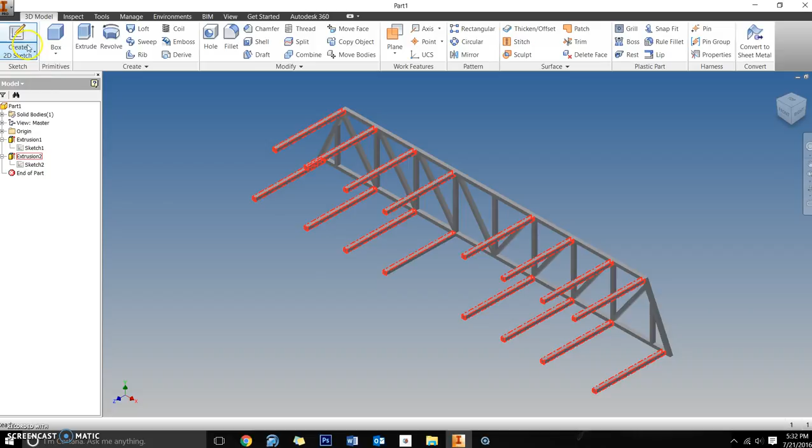Alright, so now we're going to create a third sketch. We'll go to create 2D sketch, and you're going to put that third sketch on this bottom left hand corner, on that face. So you basically create a third sketch right there. Then you're going to finish the sketch without doing anything.

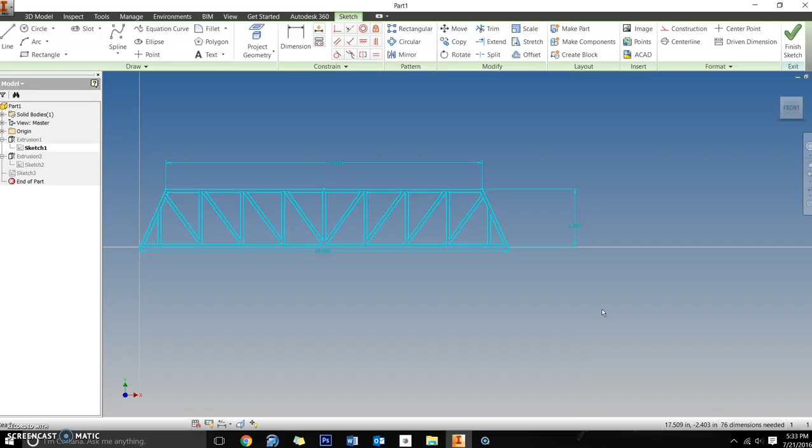You're going to go into sketch 1, double click to open it up. Left click and drag a selection box completely over all the elements, all the line segments in sketch 1. Then press Control C, the copy command, and finish that sketch without changing or modifying anything.

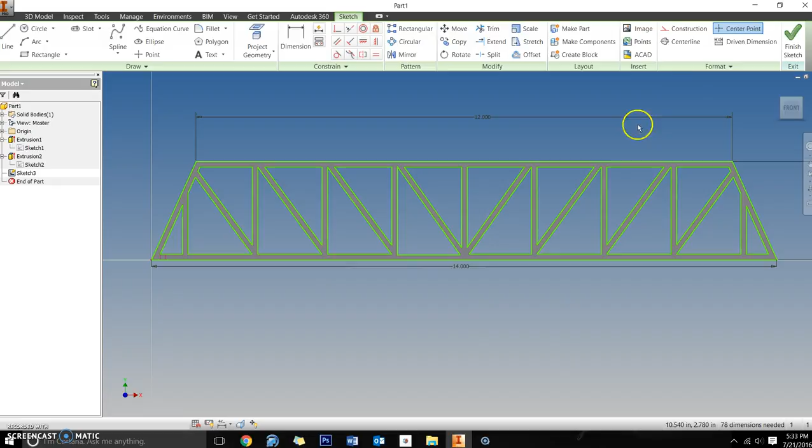Go back to sketch 3, which was on the end here. I'll just drag this over so you can see what's going to happen. Now I'll press Control V, as in Victor, and that pastes it in there. Let me show you what happened. I go to that isometric view, the home view, and I have that exact same replica of the first truss over here. I didn't have to redraw anything.

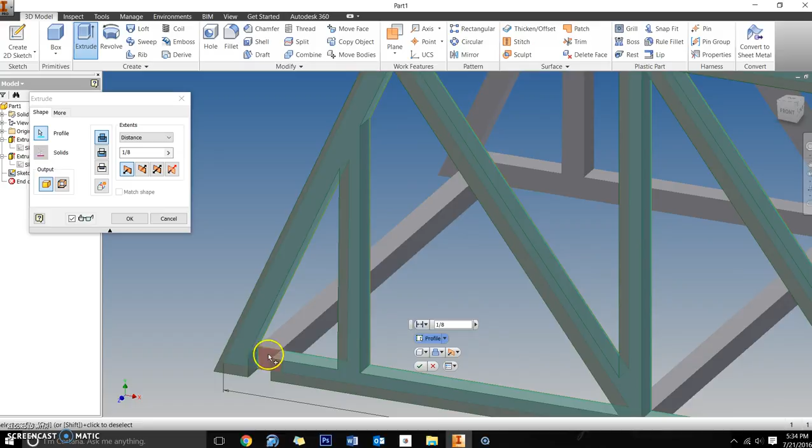So now I'm going to finish the sketch again, and extrude this at 1/8 of an inch. Again, I select that side. The only area you might have trouble with is that side we selected - for some reason it always leaves that out when we first initially selected it to be the face of the sketch. So zoom into that little area and extrude that out 1/8 of an inch as well, then click OK.

And there you go, you have the bridge. It's 3 inches wide. This example is a total of 3 inches wide, 2 1/4 for my height - again, you can have anywhere from 2 1/4 to 3 inches in height - and the length is 14 inches.

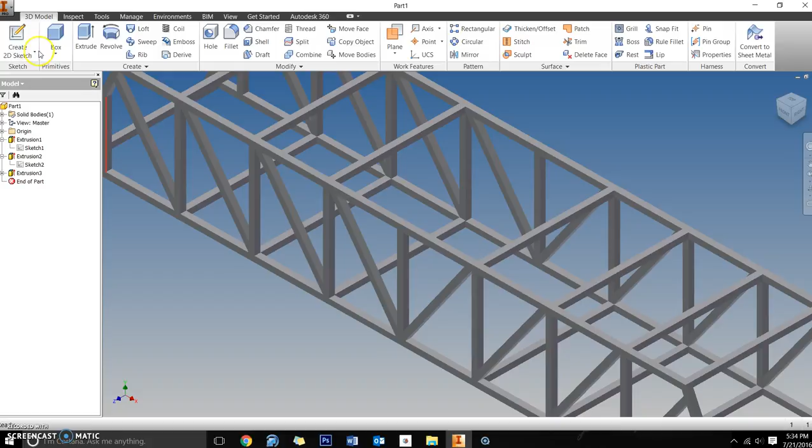Now one of the last things you need to do here is put a load platform on this. So for the load platform, I'll click on create a new 2D sketch, and again click on this front face. From there, I'll click my line tool, and I have my midpoint right here. The load platform is a 3x3 piece of balsa wood that's 1/8 inch thick.

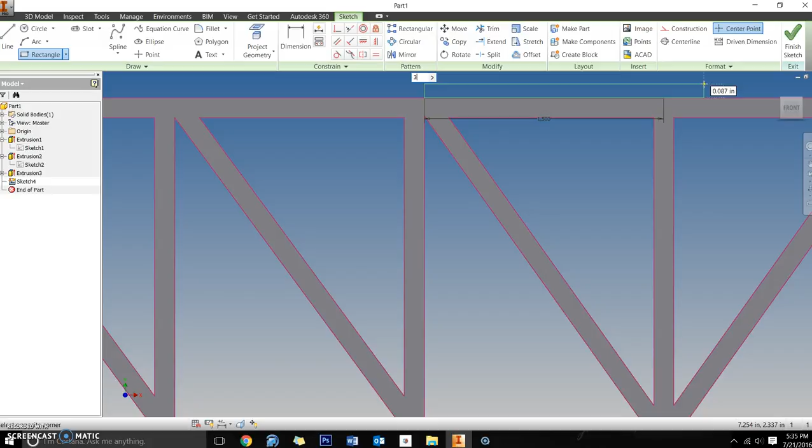So from that midpoint, here's my midpoint, it's 7 inches - you can see on the X axis it's 7. I'm going to click there, come over 1.5, which is half of 3, right? Then I'll click my rectangle tool. This gives me a guideline point. I'll select that point I just created the line to, and now create a rectangle. The rectangle is 3 inches for the total length, and I'll tab over, and the height of this will be 1/8. Then I'll finish that sketch.

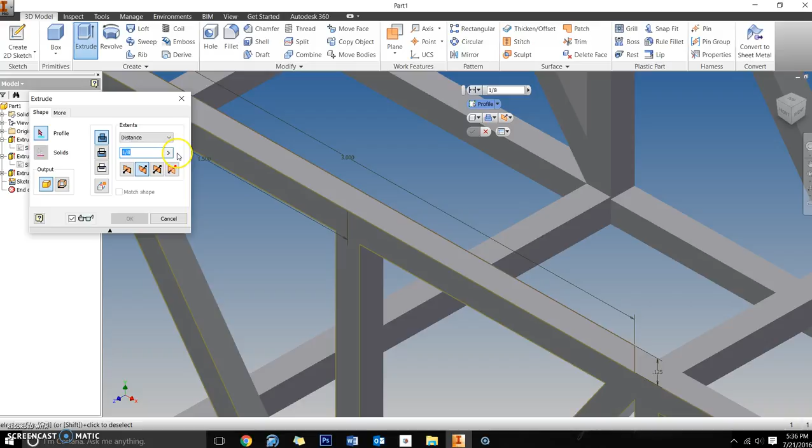Now this is in the dead center. I'm going to extrude this, and I want to extrude it back - see this direction, how it's pointing back. I'll make this 3 inches and extrude that back. If you had it going forward, it would just shoot out forward, and you can just change the direction there. Make sure it's going back across to the other side, and click OK.

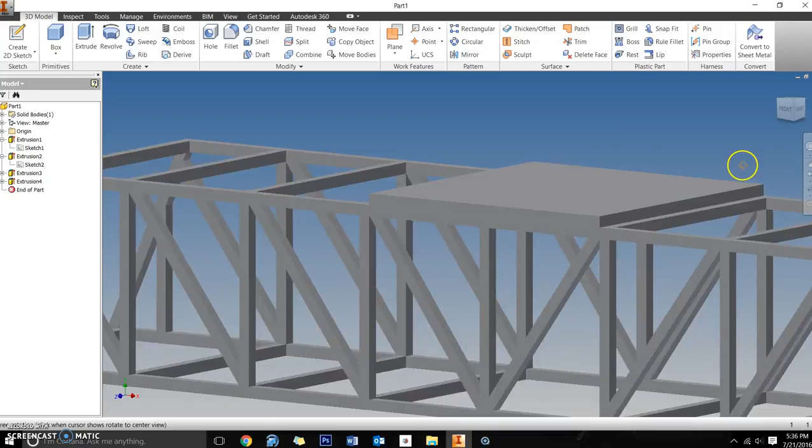At this point, you can see now that load platform is all the way across the bridge. The next thing I'm going to do is create another sketch on the top of this.

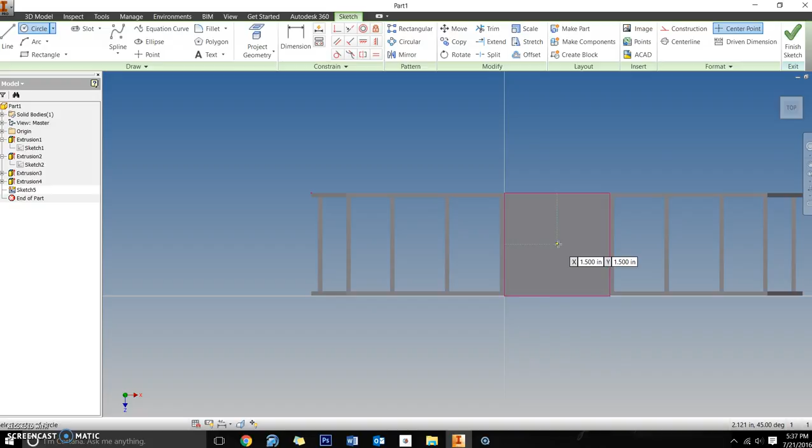Create a 2D sketch right on the top surface. Click your circle tool, and I'm going to put a hole in the dead center. The nice thing with Inventor, it'll give you guidelines showing you where the exact center is. So if you eyeball where you think the center is, you can see a vertical line and a horizontal dotted green line showing the exact center. If I look at my X and Y, it says 1.5 and 1.5, so you know you're in the right spot.

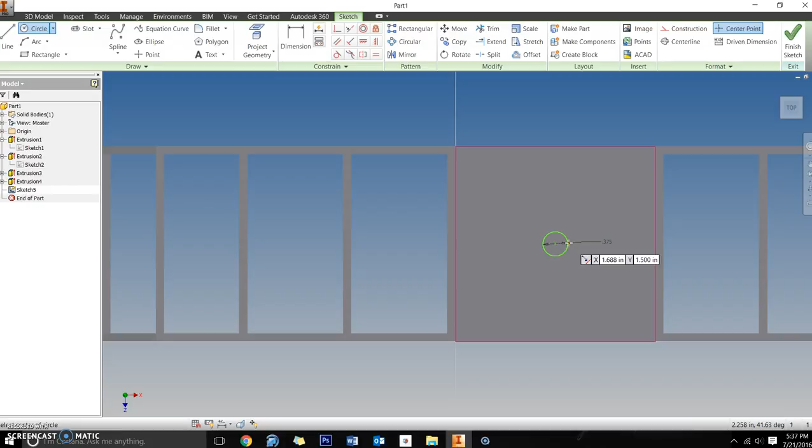So I'm going to click on that, and this is going to be a 3/8 inch circle in diameter. We'll finish that, and then extrude this. This time I'm going to cut, so I'll go to the second icon down, and cut through the surface at 1/8 of an inch. Select that, cut it, and there we go.

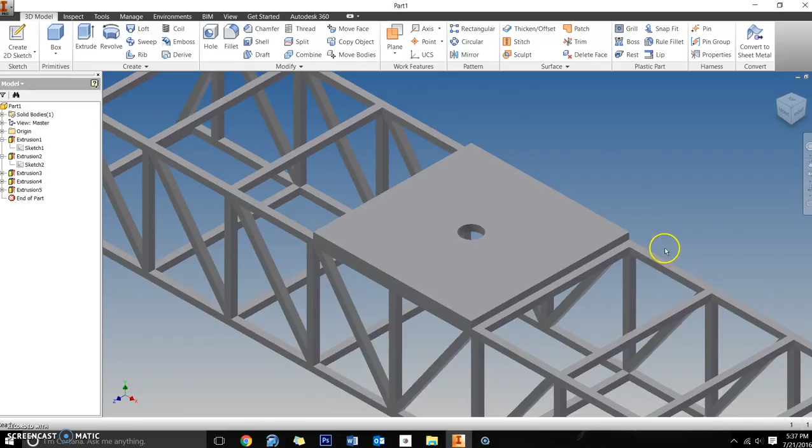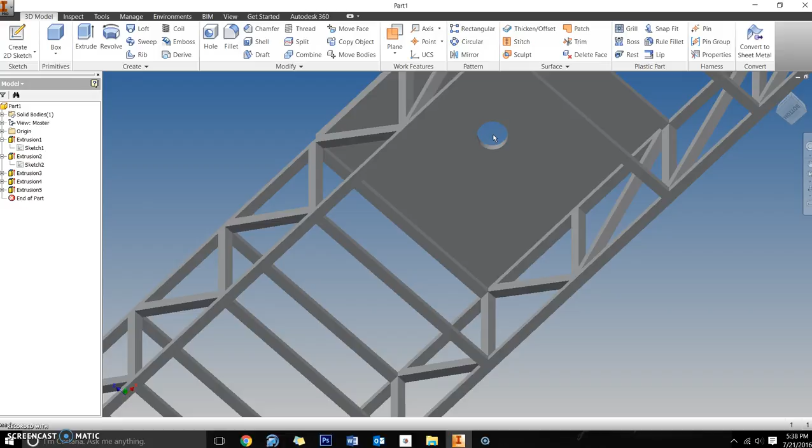Now remember I told you in the previous video you don't want any of those supports to go through the center. This is exactly why. I'm going to orbit this around so you can see the bottom. If you had a support that ran from this center post over to the other side, it would go right through that hole and you'd have to cut that out. That would not be good, so that's why you want to avoid the center, and that's the reasoning why.

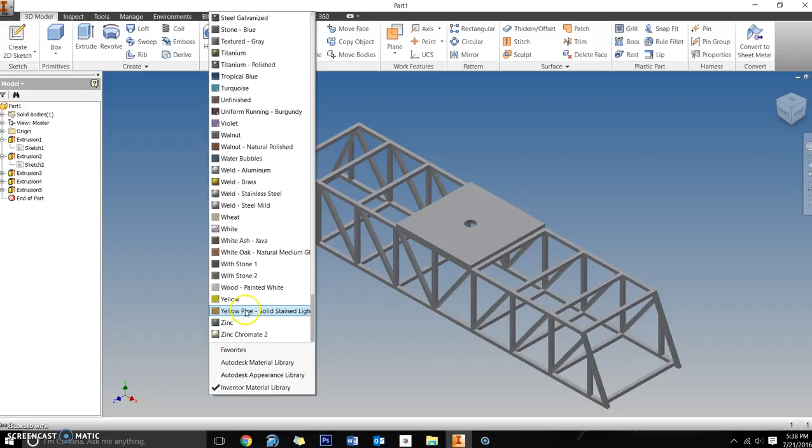Now once you have this completed, I'm going to show you how to color this so it looks more like balsa wood, because right now it just has that default gray. Select your color palette—go up above your tool panel and it says default. Default gray is the actual color we were drawing with. You're going to click on yellow pine, so scroll all the way down, go to yellow pine, and now it really starts representing the bridge you're going to be physically building.

At this point in time, you want to save this. You're going to save it two ways, and you should have been saving through the process as well. Make sure you save it as an Inventor part file—just go to Save As, and you can save it as your bridge. You're going to save this in your STEM folder, right in there as your bridge project.

The second thing you want to do is save it as what's called an STL file, and the STL file is how I 3D print this. If I don't have the STL file, I cannot 3D print this for you. So make sure you save it as an Inventor part, and then go back into the application icon at the top left hand corner. Click on that, go to Save As, click the little arrow next to Save As, and go to Save Copy As. Again, save it as the Inventor part first, then you can save it as the STL file.

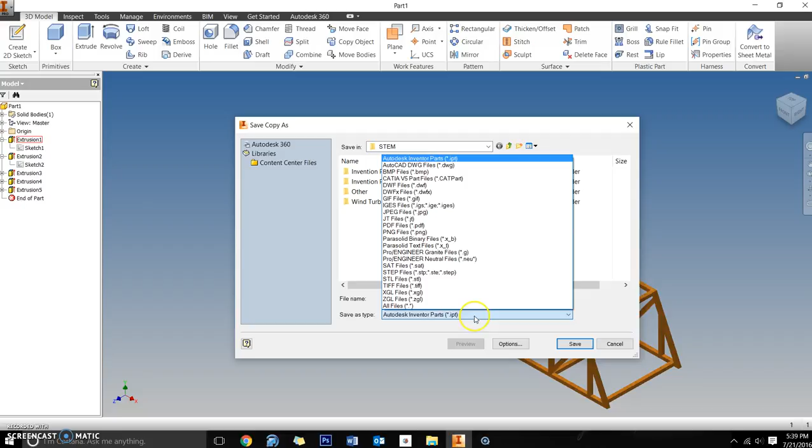Do both. Under Save As, or Save Copy As, under Save As type, click that drop down item, and go to STL, stereolithographic file, and select that. You can call this your last name—I'm just going to say Mr. Masano Bridge. And you're going to save that, and this will be an STL file.

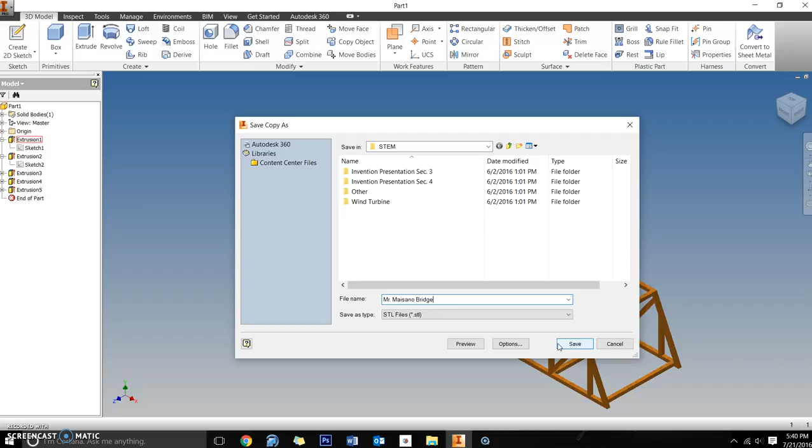You just have to let the instructor know that the bridge is ready to be 3D printed, and the STL file is in your student drive, in your STEM folder, and then they can pull that out and 3D print it for you and give you an actual 3D model of your bridge.

When you're done with this, there is a drawing file you still need to complete. We'll have a video up on that as well that you can use to help, and then you can physically start building the bridge itself. Again, if you have any questions, review an earlier section of the video, talk to a classmate, or speak with your instructor. Alright, good luck.